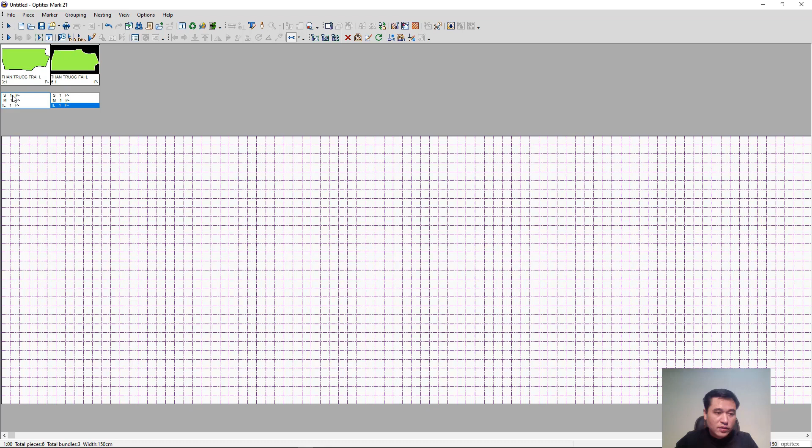Now let's try to take down this front bodice piece and see how it's done. Matching line, see here, this armhole horizontal line matches the armhole line on this side. Even if we move this individual piece to any other spot, the line we've marked will still align perfectly with the drawn line. Can you see it? Isn't that cool? This works for other sizes too, and when done this way, it can be graded for all the different sizes, not just a single one.

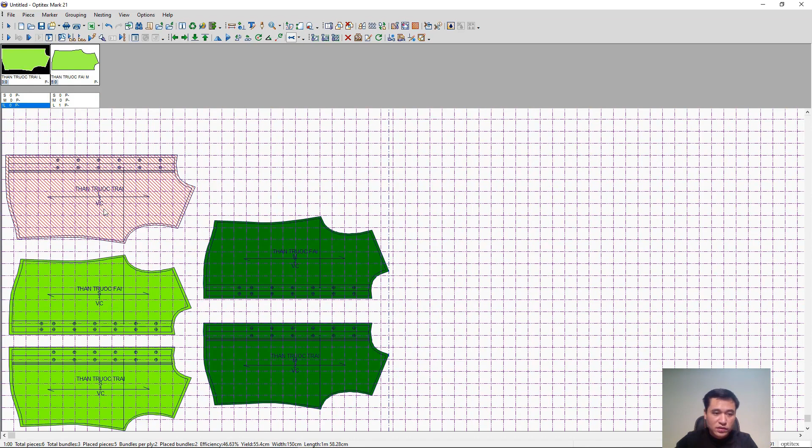See, can you see that? It can be graded for different sizes.

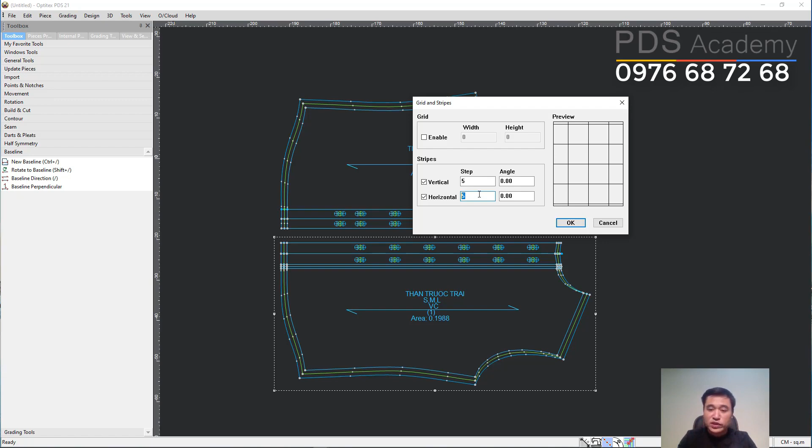Here we will click OK. Now you will see that in the PDS window, the grid lines have appeared right here, and each individual square corresponds to exactly 5 centimeters, which perfectly matches the specific value we just entered into the system.

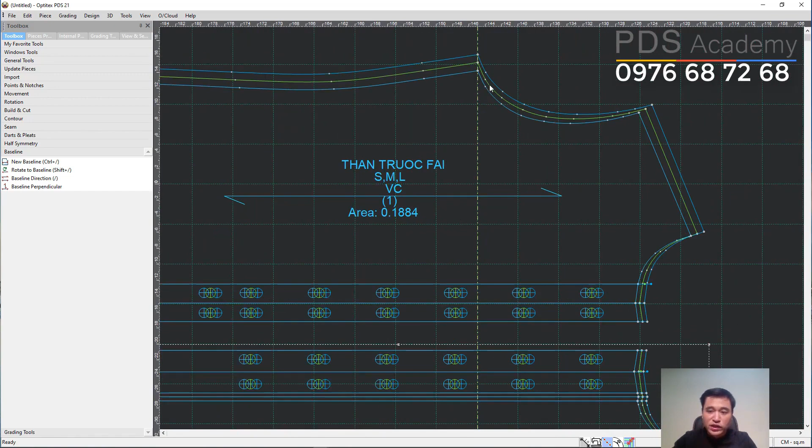Next, we need to draw the lines starting from the armpit. Draw the lines from the armpit here. Alternatively, you can utilize any particular reference points that the customer explicitly requests you to align with. Then you should use exactly those points. I'll use the armpit point as an example here.

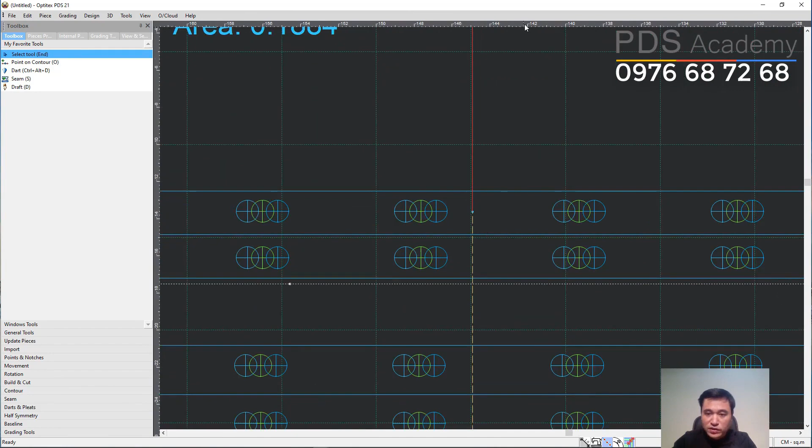So, I will draw a line from this armpit towards the middle section in the front first, towards the center front. Okay, I'll use this point. If you want it to be precise at the center button line, you should align the ruler with the center button line, and you can move this point to the intersection of the center button line and the armpit horizontal line. So here, I'll use this point as an example.

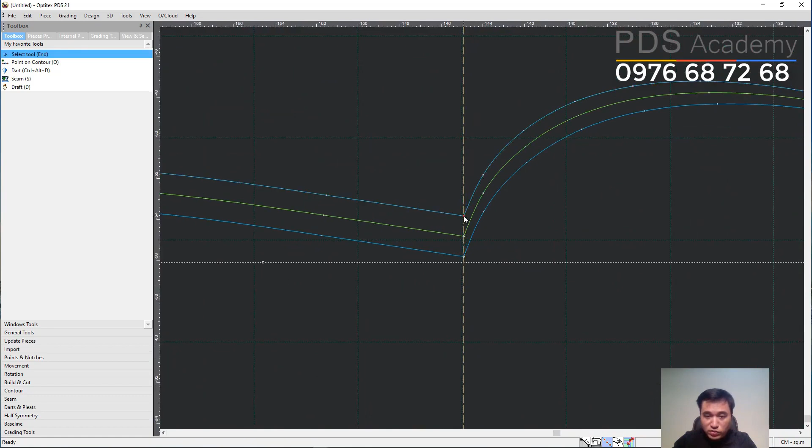Next, on this left body piece, I will also create a similar line. But before creating it, I will move the armpit point to the correct position. I will also sketch a straight line to the midpoint of the front bodice, and then I will draw another line from the bottom of the armhole to the center of the front bodice here.

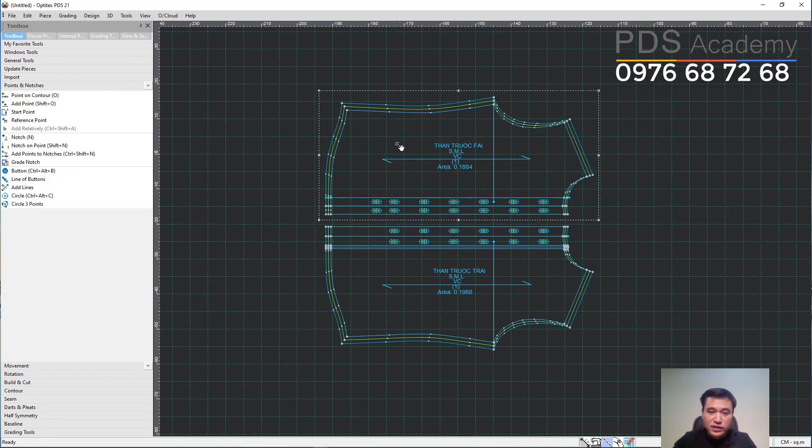After that we can press Ctrl-Alt-G to remove all the guidelines, and we will click on this detail. Then we will move the point we just identified to exactly the corresponding point.

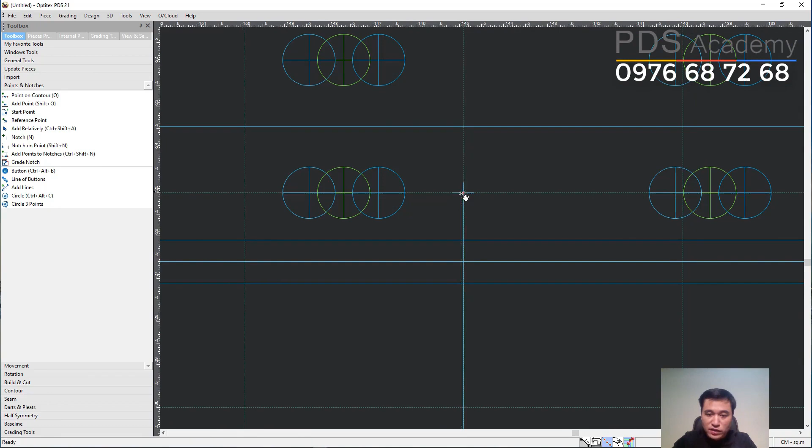For example, we will take the exact intersection point between these horizontal and vertical lines, and place a point right there. On the left front body part as well, I will place it exactly at the intersection of the horizontal and vertical lines, making sure it is precisely positioned.

Once that's done, we need to pay attention here. The vertical line along the body will align exactly with the center line, while the horizontal line of the body will run perpendicular, straight from the armpit point across to the center front. Both the right and left body parts are the same.

After we have set it up like this, we will click on this body part, then go into the Piece section and into Fabric and Stripe. We will go to Relate Piece to Stripe, check both by X and by Y boxes, and then click OK.

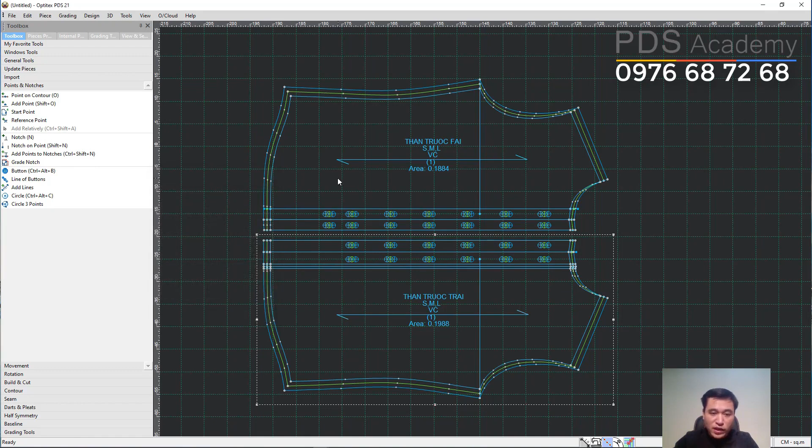Next, we will click on the right body part and select the Fabric and Stripe section here, and also select by X and by Y, so it will align with both the X and Y axes. After that, we will click OK, and that's it, we're done.

Now we will arrange it again, according to the name that we have chosen: SM2022.

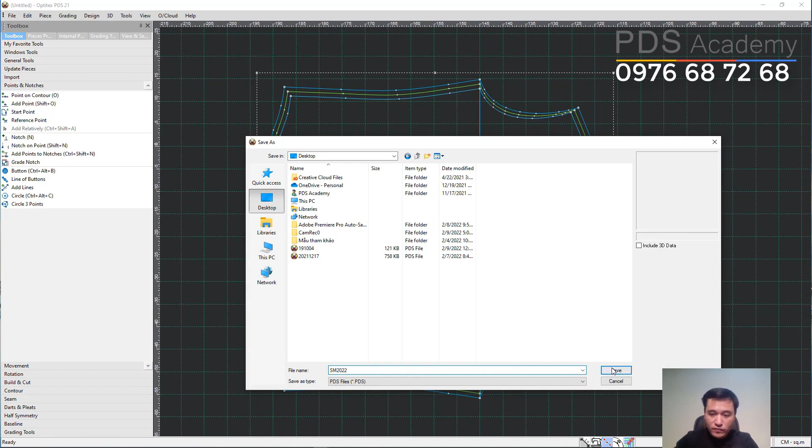Once you have finished arranging it, we will close out of this current window and click on the new button to move to a new page.

Now we will open the diagram section and set up the grid just like in the PDS section. We will go into this stripe section and enter the horizontal and vertical grid intervals here, then click OK to finish.

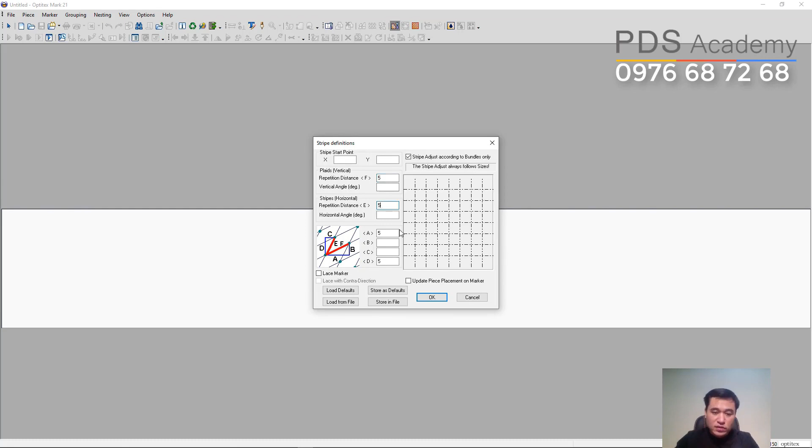Next, we will go into Open Style, and go into this file name section to select the PDS file where we just set up the horizontal and vertical grids. After that, we will click Open.

Next, we will select what type of fabric this is. We will choose the type of fabric. For example, I'll use size S, size M, and size L, and each of these sizes will be a separate product. After that, I will click OK.

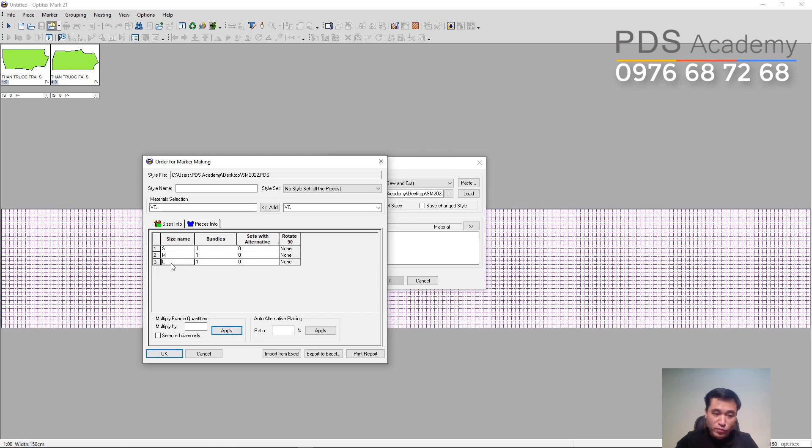I'll click OK. Let's try removing this front bodice piece—is it on the grid or not? There, see it? It's this horizontal armhole line, and it will align with the horizontal armhole line on this side. Even if we move this piece anywhere else, the line we've marked will still perfectly align with the grid line. See that? Isn't that cool?

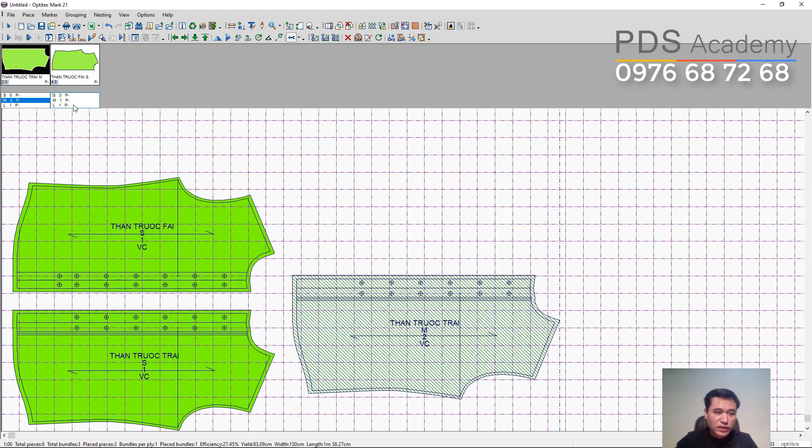And it's the same for other sizes, not just one size. When you do it this way, it works for all sizes, not just a single one. See, you guys? It will work for all sizes.

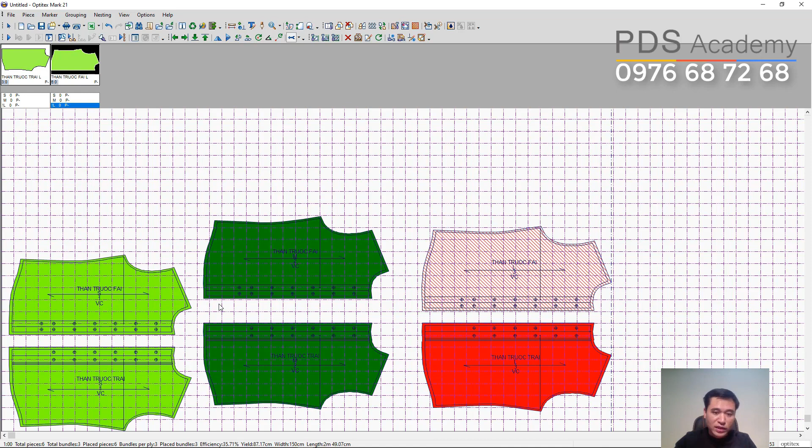So this is how you set it up to make sure your pieces align with the grid. Just now I was aligning the pieces manually, but if you want to do it automatically, let me show you an example. I'll press this automatic button.

You'll see here, the details have been automatically arranged and they're scattered all over. But the line that we set to match the grid will align exactly with the grid line—it won't go outside anymore. After about a minute, you'll see that our layout has been automatically arranged and it's done.

When you take another look, you'll see that the lines we arranged automatically still remain perfectly aligned with the correct lines—they still correspond precisely with these grid lines. See that? They match exactly with the grid line. Here, I'll just use the example of the two front panels.